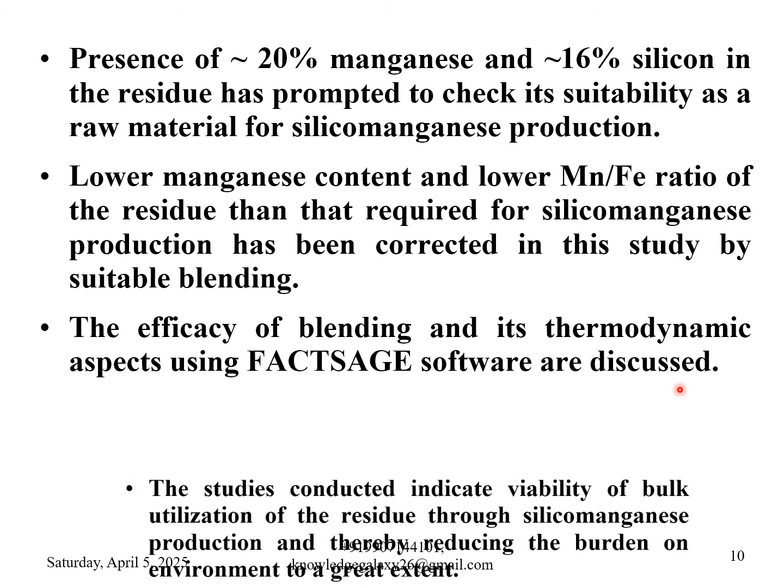The efficacy of blending and its thermodynamic aspects using FactSage software are discussed. The studies conducted indicate viability of bulk utilization of the residue through silicomanganese production and thereby reducing the burden on environment to a great extent.

So now let's have the introduction. This was the synopsis. Now let's have the introduction. Rapid depletion of major non-ferrous metal resources have stimulated efficient use of available land-based resources and vigorous search for new sources. Manganese nodules available in the beds of Pacific, Atlantic and Indian Oceans appear to be a solution for copper, nickel and cobalt.

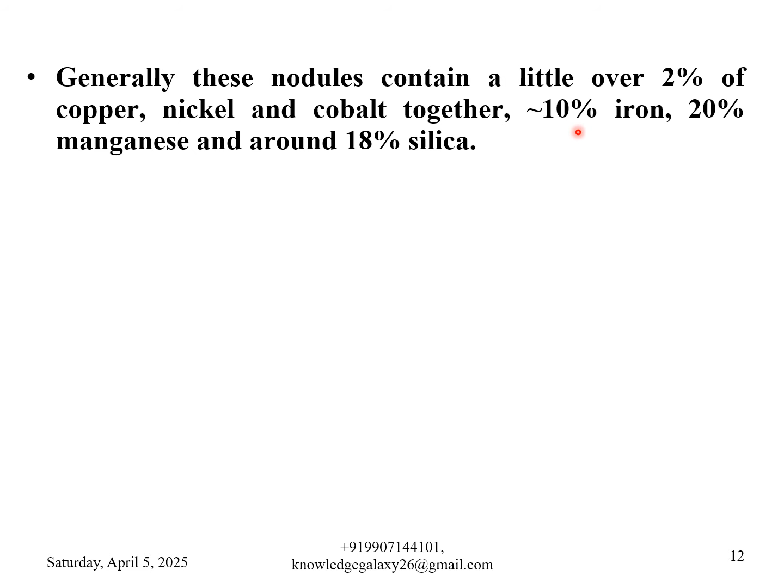Concentrations of these metals are comparable to the sum of the land-based resources. Availability of these metals in the ocean beds in manganese nodules is much more than that in the terrestrial resources. Generally, these nodules contain a little over 2% of copper, nickel and cobalt together and equivalent to 10% iron, 20% manganese and around 18% silica.

So far, the attempts have been to extract copper, nickel and cobalt from these nodules due to first strategic reasons and second their fast dwindling deposits. Though manganese is the major element in the oceanic nodules, little attempt has been made on its extraction owing to its extensive terrestrial deposits.

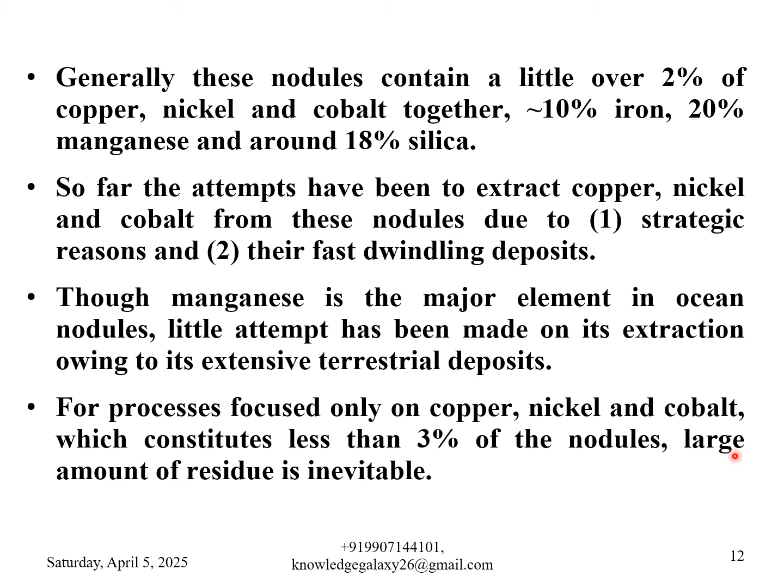For process focused only on copper, nickel and cobalt, which constitutes less than 3% of the nodules, large amount of residue is inevitable. This would be quite undesirable from the material conservation and process economics point of view. Besides, the environmental and ecological problems associated with this residue are also of great concern. Utilization of this residue for value-added products would be a better option to address the concerns mentioned above.

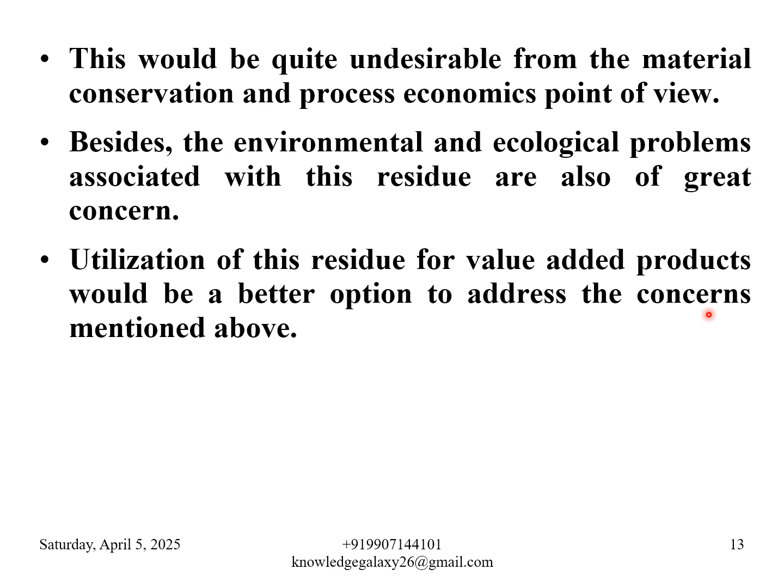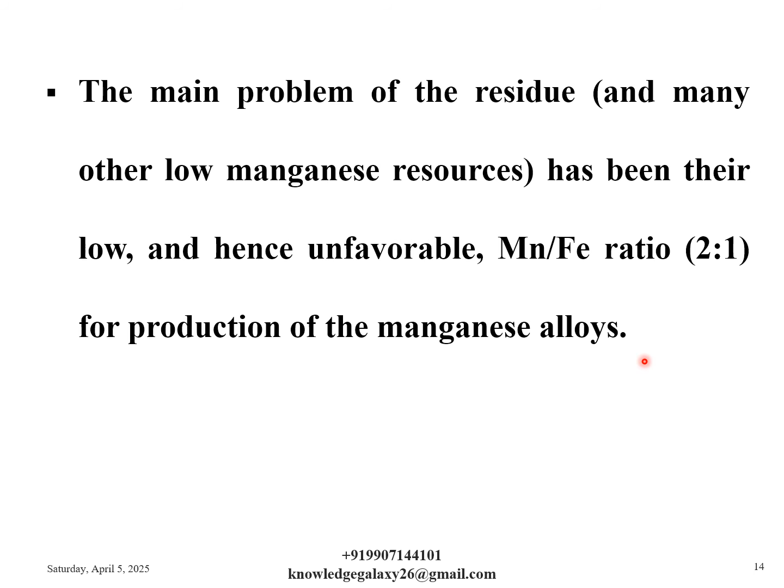Use of these residues as catalysts and or as an adsorbent for some of the heavy toxic elements is notable among them, though their consumption in these applications will be meager compared to their expected generation. The main problem of the residue and many other low manganese resources has been their low and hence unfavorable Mn/Fe ratio, that is equivalent to 2:1, for production of the manganese alloys. This drawback has been overcome suitably and has yielded standard grade silicomanganese.

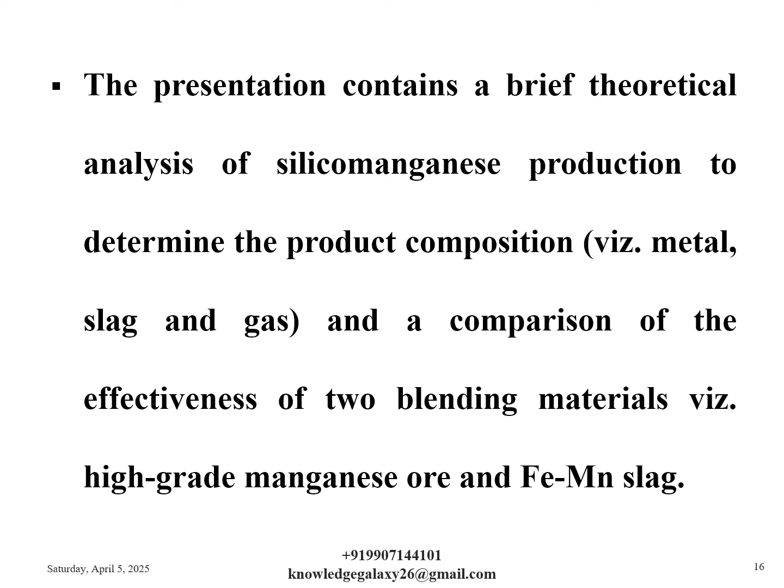There is little information other than that mentioned earlier available in the literature on the utilization of the leach residue in silicomanganese production. Generally, silicomanganese is produced in electric arc furnace by carbothermic reduction of manganese oxides and quartz or other silica sources.

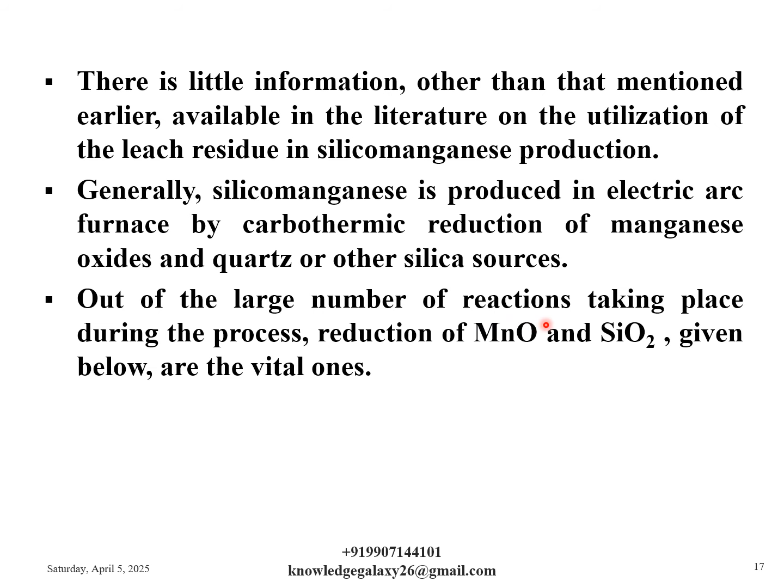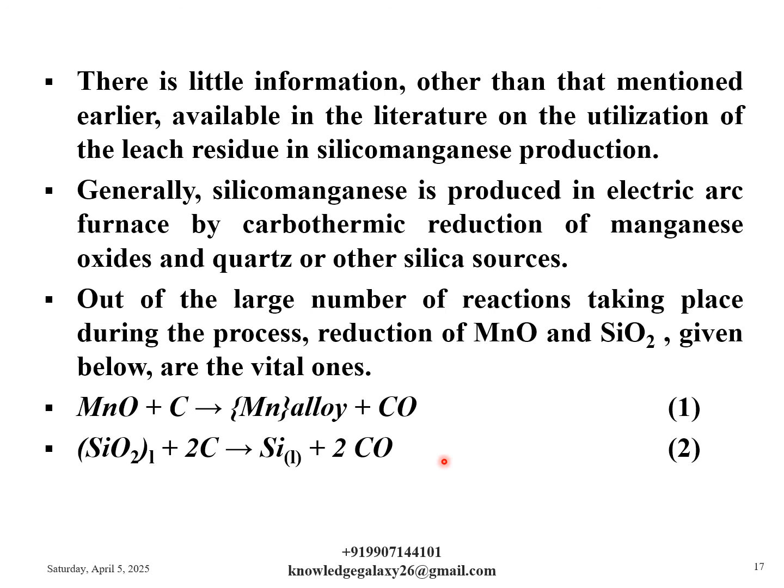Out of the large number of reactions taking place during the process, reduction of MnO and SiO2 given below are the vital ones. So first reaction is MnO plus C, this gives Mn alloy plus CO gas. SiO2 in liquid phase plus 2C, this gives Si liquid plus 2CO gas. These are the two main reactions in a generalized way.

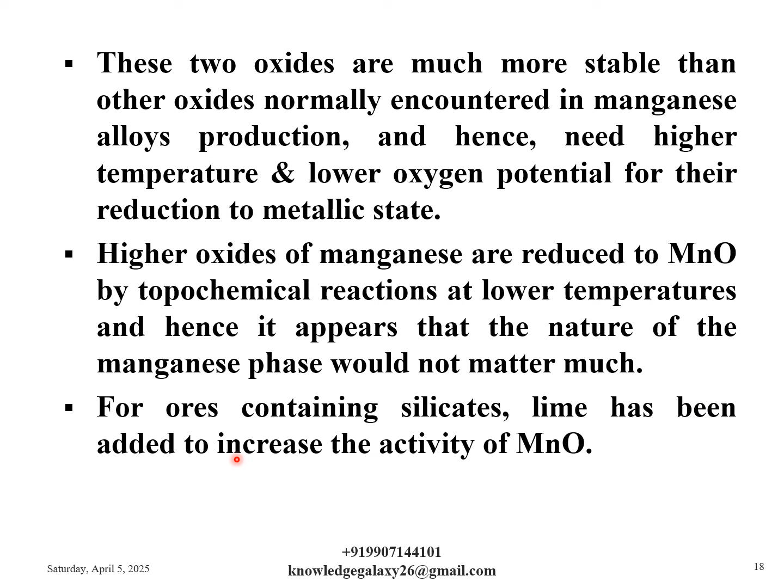These two oxides are much more stable than other oxides normally encountered in manganese alloys production, and hence need higher temperature and lower oxygen potential for their reduction to metallic state. Higher oxides of manganese are reduced to MnO by topochemical reactions at lower temperatures, and hence it appears that the nature of the manganese phase would not matter much. For ores containing silicates, lime has been added to increase the activity of MnO.

Being less stable, iron oxides get reduced progressively to its metallic state before the reduction of MnO and SiO2, and as a result, practically all iron reports to the alloy phase. As a result, selective reduction of manganese cannot be attained through maneuvering of the operating parameters, and this restricts the use of resources with low Mn by Fe ratios.

My dear friends, in practical industrial operations, you might have faced this difficulty that low Mn by Fe ratio ores are not used very much, and it is very difficult to utilize them, and you might have been asked why low Mn by Fe ratio ores cannot be used, or what is the drawback of using them. So I hope I have provided you the reason why low Mn by Fe ratio ores are not utilized or cannot be used.

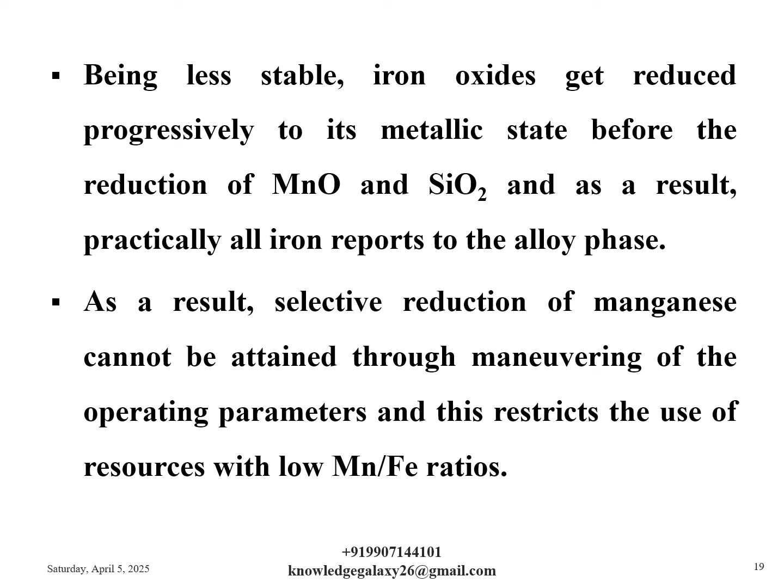Further, the requirements of higher manganese reduction or recoveries are contrasting to that of silicon, a basic slag for manganese and an acidic slag for silicon reduction. I am again repeating it: a basic slag is required for manganese reduction and an acidic slag for silicon reduction. Composition of the charge and the operating conditions hence need to be balanced to have good recovery and desired grade.

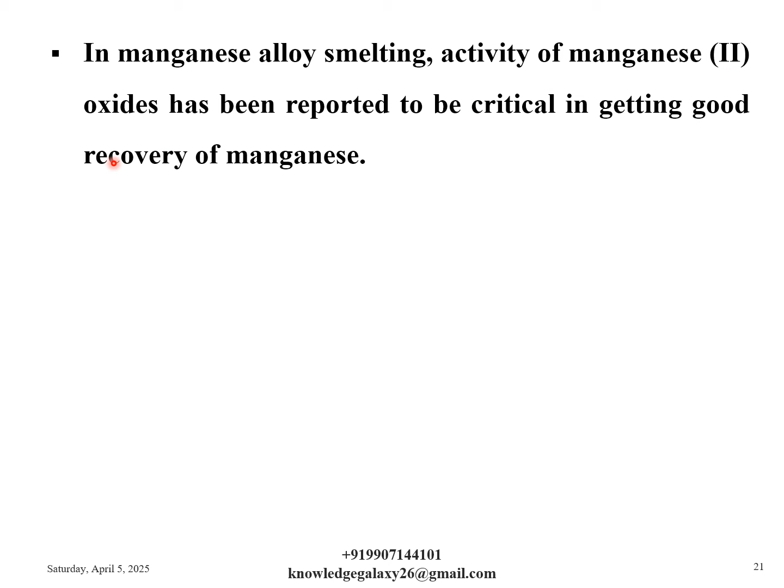In manganese alloy smelting, activity of manganese(II) oxide has been reported to be critical in getting good recovery of manganese. Reports suggest that secondary raw materials such as slag, etc. in the charge may affect the recovery of manganese adversely. Here the slag refers to high carbon ferromanganese slag.

Partial replacement of lime by MgO increases the melting temperature as a result of the increase in resistivity, which in turn enhances the grade and recovery in silicomanganese alloy production. My dear friends, this is the main reason why to use dolomite, which is a double oxide of CaO and MgO, as a flux in place of lime. So this is a very useful point. Please do remember this.

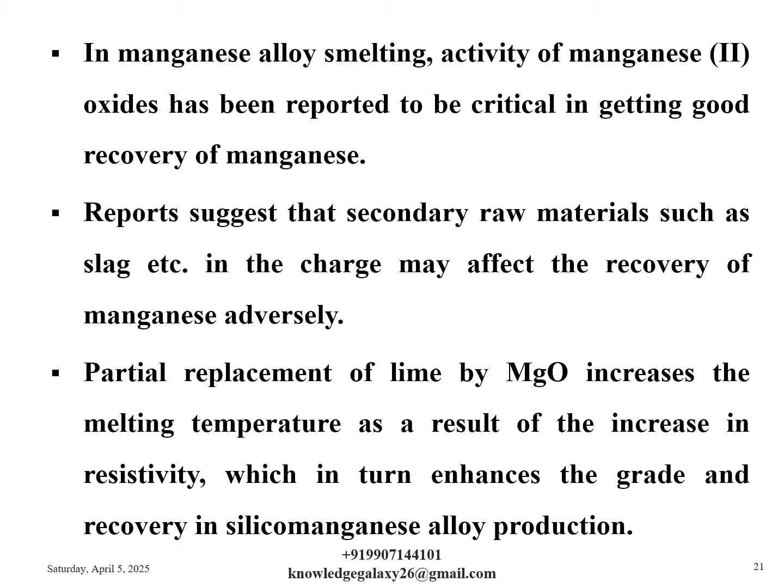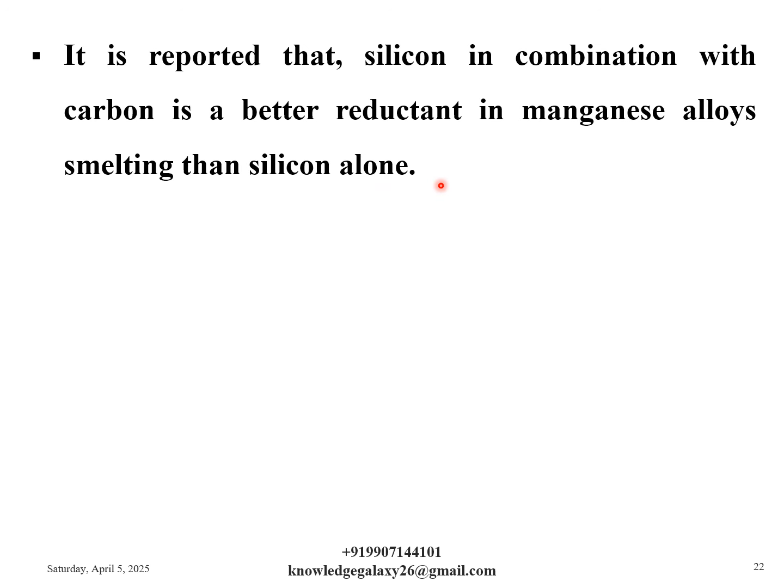It is reported that silicon in combination with carbon is a better reductant in manganese alloys smelting than silicon alone. Quartzite coke has been found to be better in terms of recovery and grade of manganese than metallurgical coke. Silicothermic reduction of slag has also been tried for the production of silicomanganese.

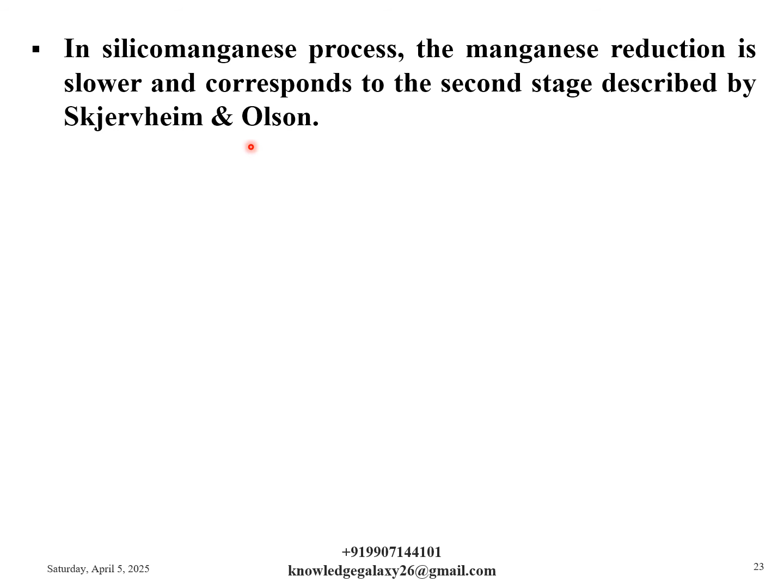In silicomanganese process, the manganese reduction is slower and corresponds to the second stage described by Skjervheim and Olson. The slow reduction rate in silicomanganese process is also attributed to the decreased MnO activity due to the presence of Al2O3 and/or SiO2.

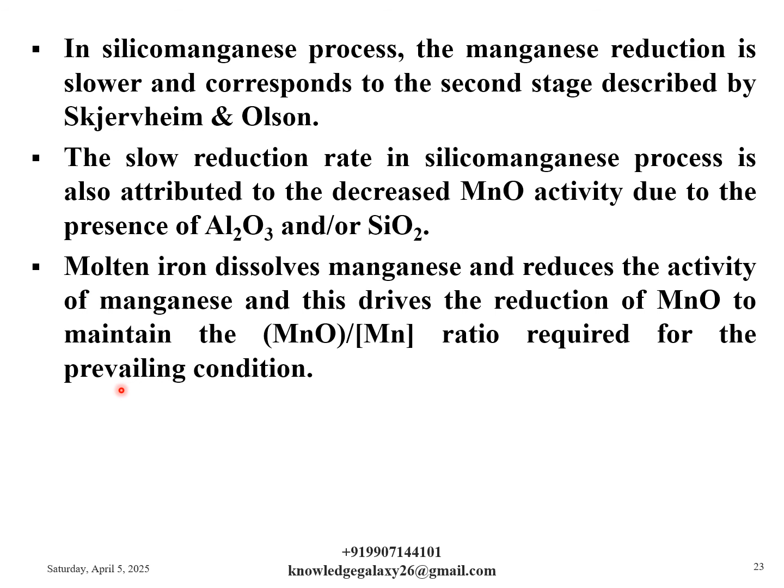Molten iron dissolves manganese and reduces the activity of manganese, and this drives the reduction of MnO to maintain the MnO by Mn ratio required for the prevailing condition.

With the increase in silicon content of the alloy, carbides become less stable and silicides become dominant, which implies the carbon content of the alloy decreases with increase in silicon content. My dear friend, this is also a very good and very important observation, that silicon and carbon are inversely proportional. That means with the increase of silicon content, carbon content decreases.

As you might have observed, higher grade of silicon in silicomanganese has a lower amount of carbon, and this is also depicted by a very nicely explained curve, which is also available in my videos of production of silicomanganese. So you can refer to that video for knowing about the curve.

Low manganese, high iron ores can also be used for making silicomanganese after converting it to a high manganese slag. It is possible to obtain silicomanganese with low sulfur and phosphorus content even from fine substandard manganese bearing materials using plasma technology. The escape of SiO and manganese vapors, etc., which are likely in silicomanganese smelting, needs to be minimized suitably to avoid material losses.

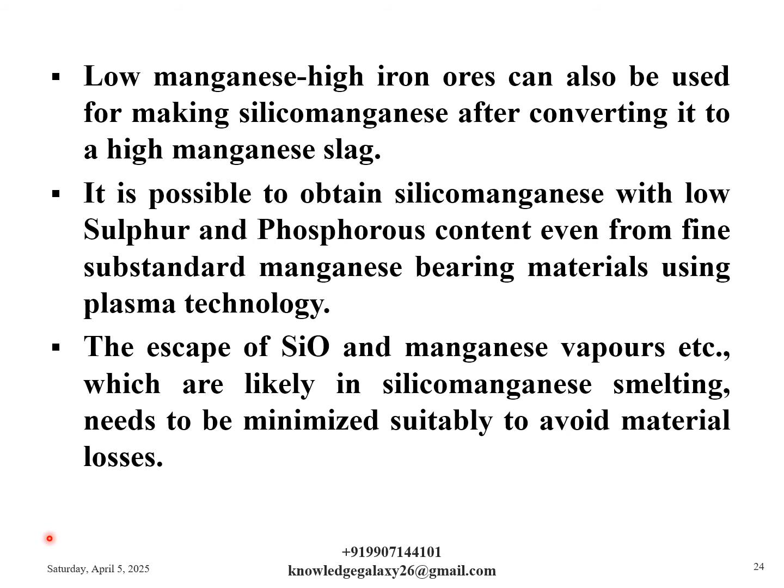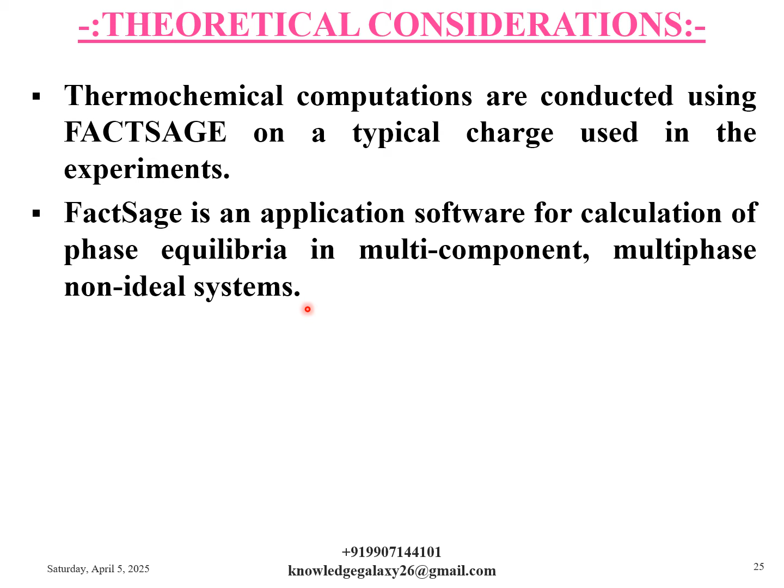Now let us have some theoretical considerations. Thermochemical computations are conducted using FactSage on a typical charge used in the experiments. FactSage is an application software for calculation of phase equilibria in multi-component, multi-phase, non-ideal systems. It works by Gibbs energy minimization using a diverse set of solution models available within it.

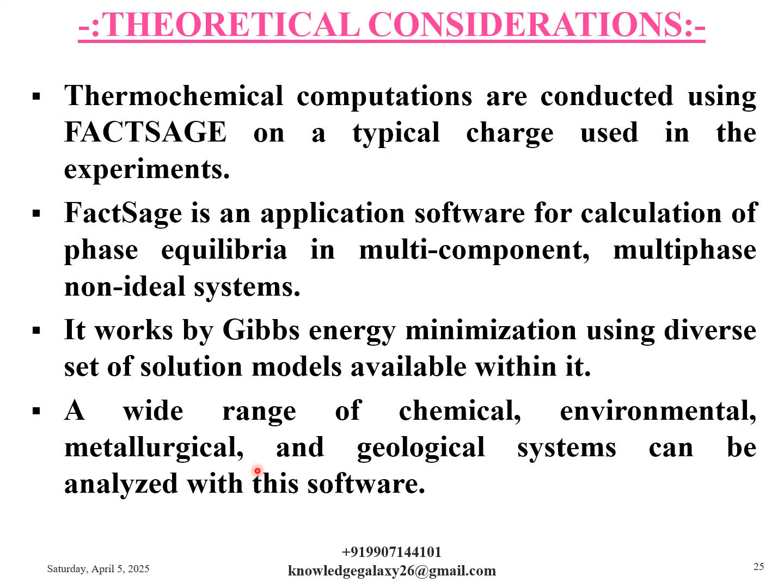A wide range of chemical, environmental, metallurgical and geological systems can be analyzed with this software. The moles input to the software is given in table 1 in the next slide and corresponds to the charge given at table 8. Table 8 is presented later in this presentation.

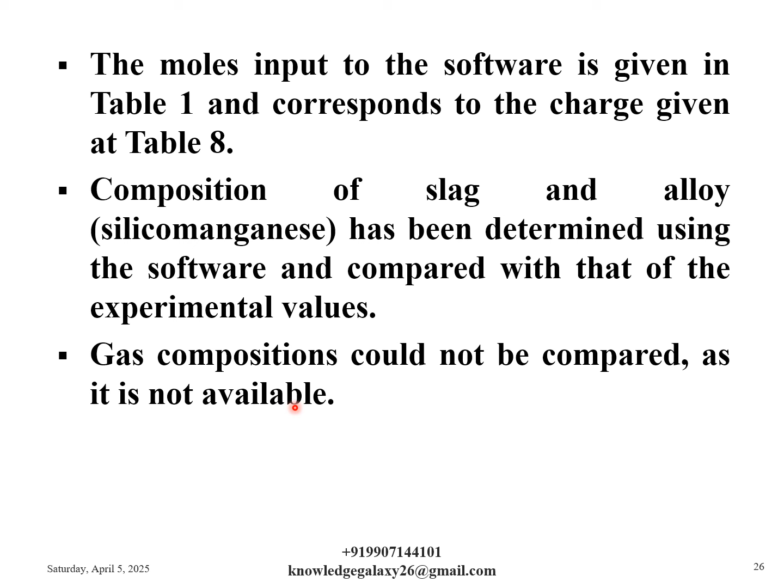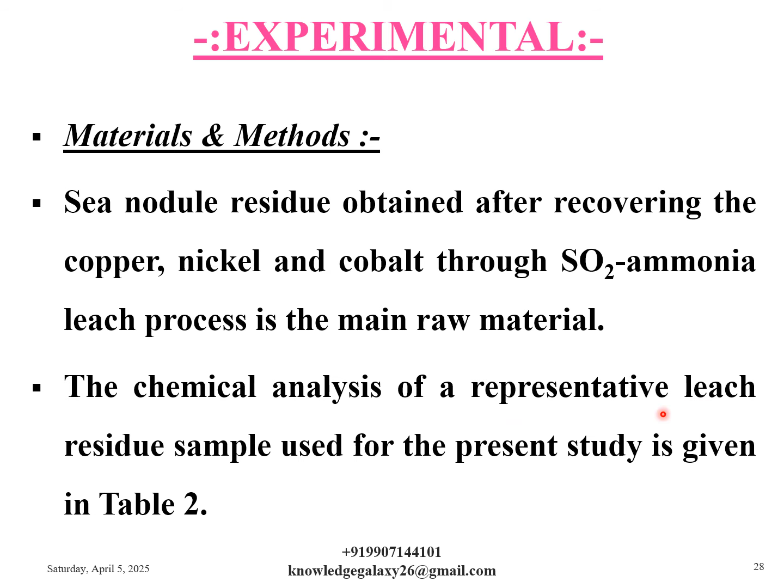Okay, moving ahead. So now let us discuss the experimental, what we have done. So first is materials and methods. Sea nodule residue obtained after recovering the copper, nickel and cobalt through SO2 ammonia leach process is the main raw material. The chemical analysis of a representative leach residue sample used for the present study is given in table 2.

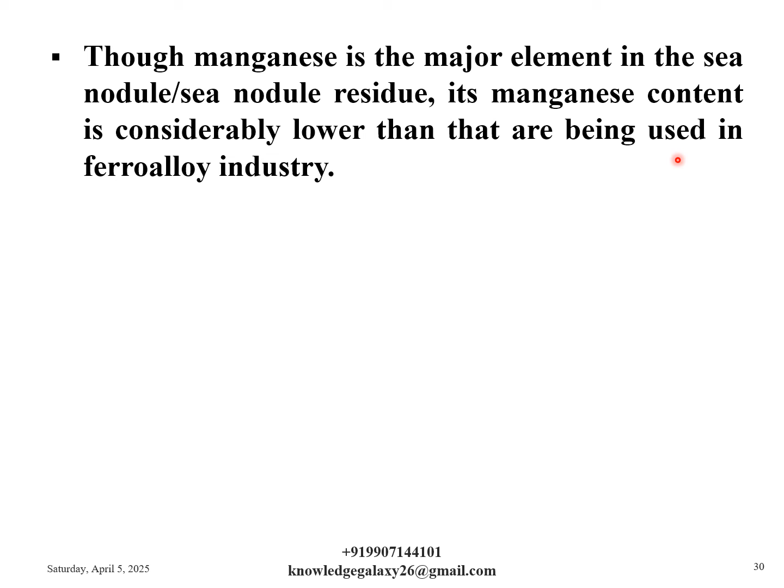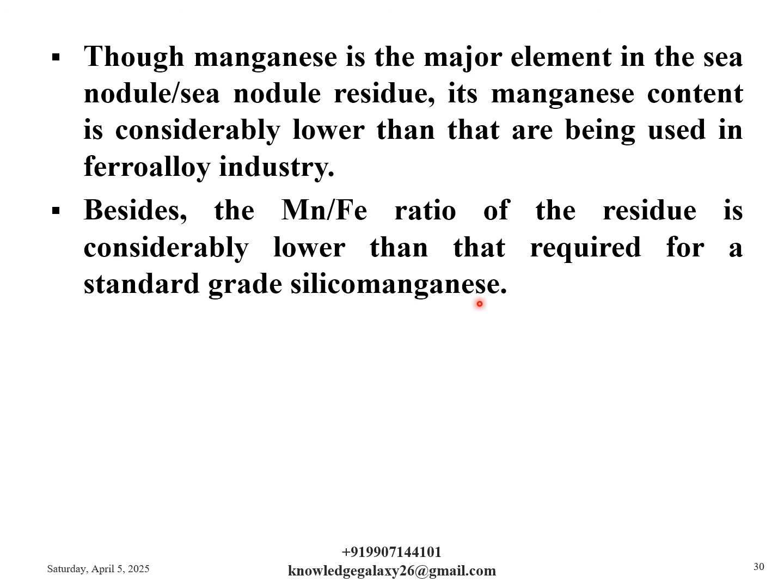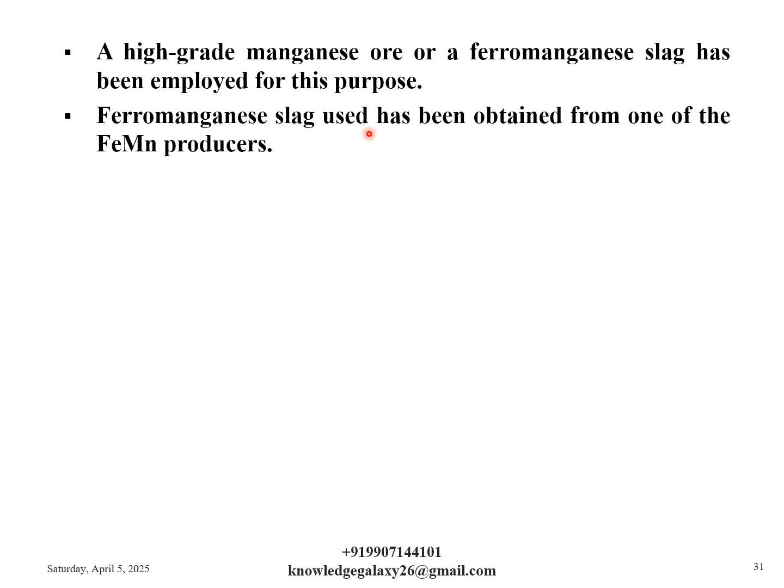As the scope of improving the grade of the residue by physical concentration methods is practically nil, the residue has been enriched through proper blending. A high-grade manganese ore or a ferromanganese slag has been employed for this purpose, that is for the blending of low-grade manganese sea nodule residue. Ferromanganese slag used has been obtained from one of the ferromanganese producers. The manganese ore has been from indigenous mines.

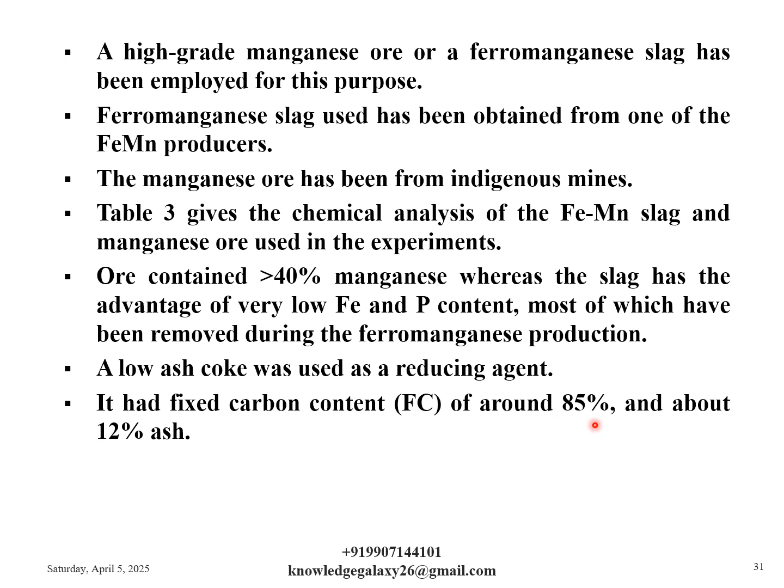Table 3, which is given in the next slide, gives the chemical analysis of the ferromanganese slag and manganese ore used in the experiments. Ore contained more than 40% manganese, whereas the slag has the advantage of very low iron and phosphorus content, most of which have been removed during the ferromanganese production. A low ash coke was used as a reducing agent. It had fixed carbon content, that is FC, of around 85% and about 12% ash.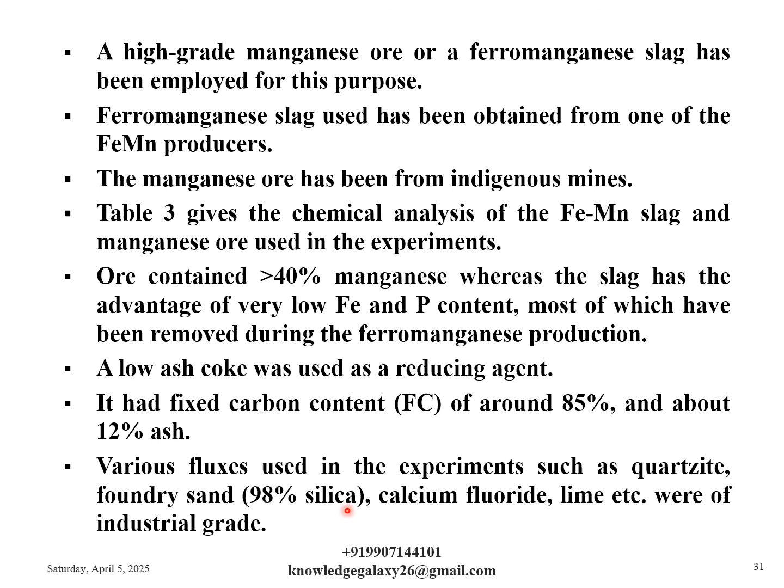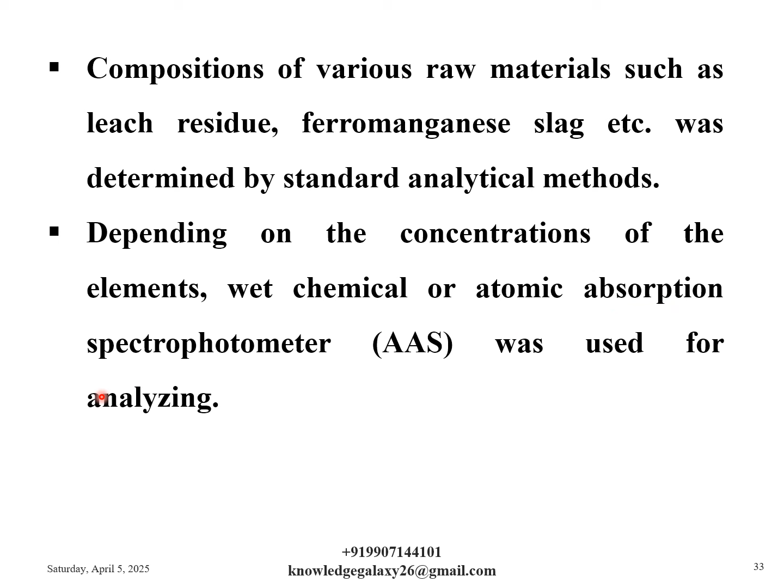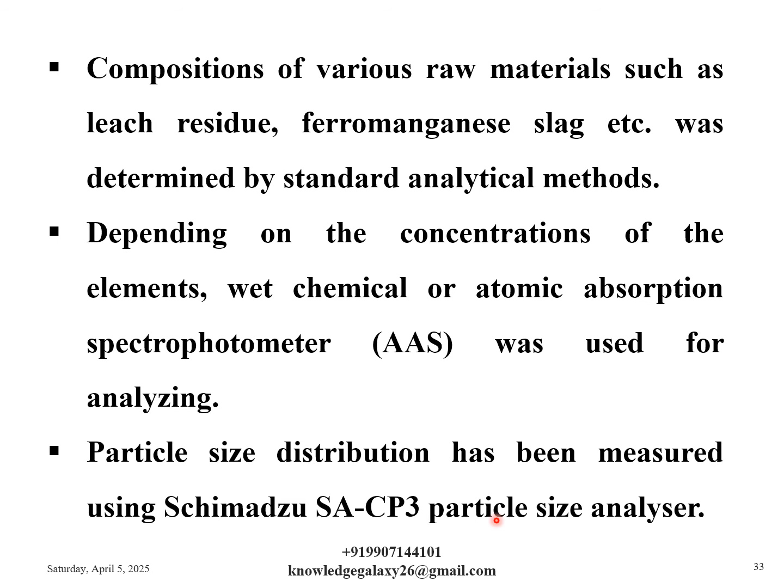Compositions of various raw materials such as leach residue, ferromanganese slag, etc. were determined by standard analytical methods. Depending on the concentrations of the elements, wet chemical or atomic absorption spectrophotometer, that is AAS, was used for analyzing. Particle size distribution has been measured using Schimadzu SA-CP3 particle size analyzer.

So now let us discuss the smelting process. The fine nature of the residue, characterized by D50 equivalent to 10 micron and D10 equivalent to 3 micron, necessitated its agglomeration to avoid material losses and to have sufficient charge permeability.

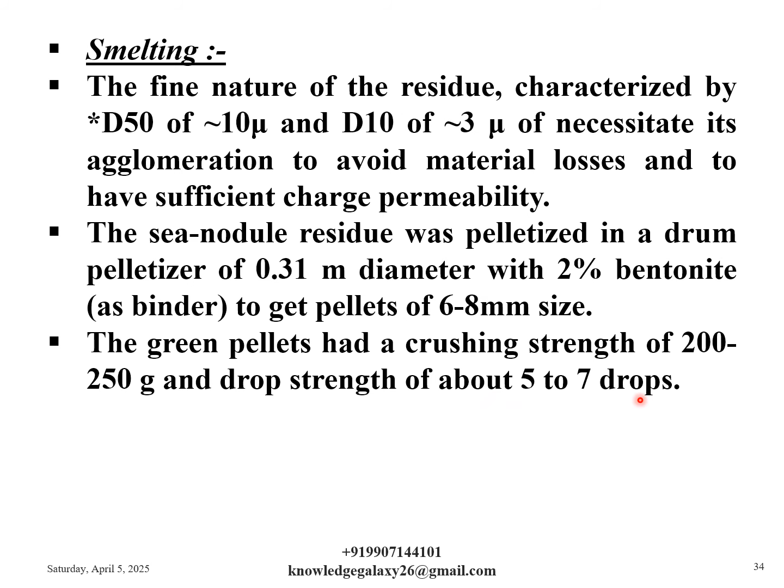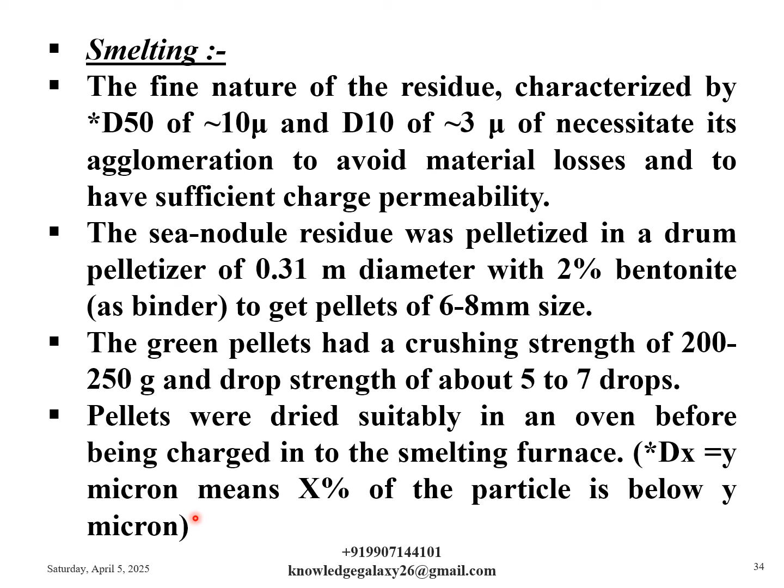The sea nodule residue was pelletized in a drum pelletizer of 0.31 meter diameter with 2% bentonite as binder to get pellets of 6 to 8 mm size. The green pellets had a crushing strength of 200 to 250 gram and drop strength of about 5 to 7 drops. Pellets were dried suitably in an oven before being charged into the smelting furnace. Here Dx equal to y micron means x% of the particles are below y micron.

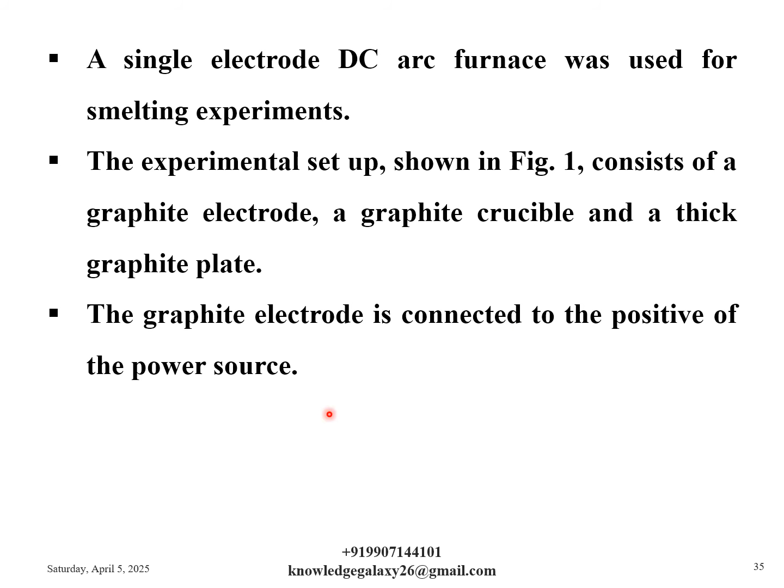A single electrode DC arc furnace was used for smelting experiments. The experimental setup is shown in the figure in the next slide. It consists of a graphite electrode, a graphite crucible and a thick graphite plate. The graphite electrode is connected to the positive of the power source. The graphite crucible rests on the graphite plate, which is connected to the negative of the power source. So this is the experimental setup for smelting, and the details I have just explained.

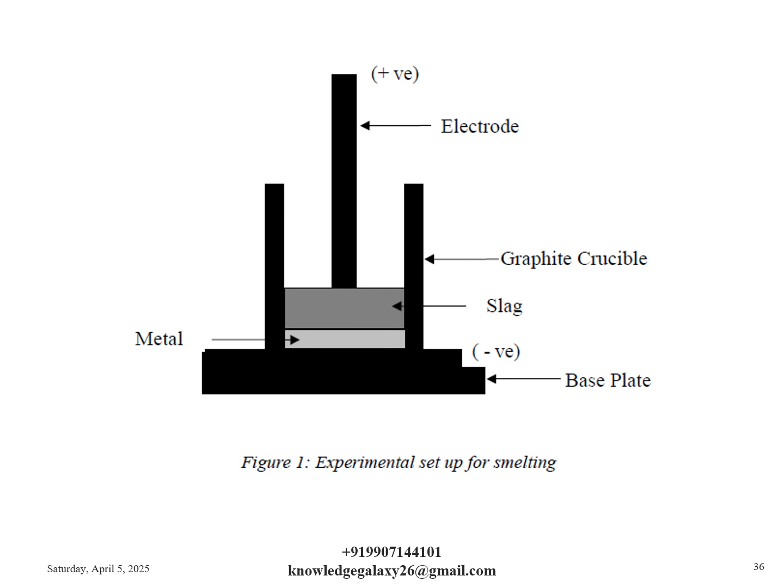The crucible and the plate together act as the negative electrode of the system. The graphite electrode, which is connected to the positive of the power source, can be positioned at any desired level in the vertical direction with the help of a motorized rack and pinion arrangement. A refractory jacket around the crucible prevented heat losses from the system. The charge is smelted in the graphite crucible.

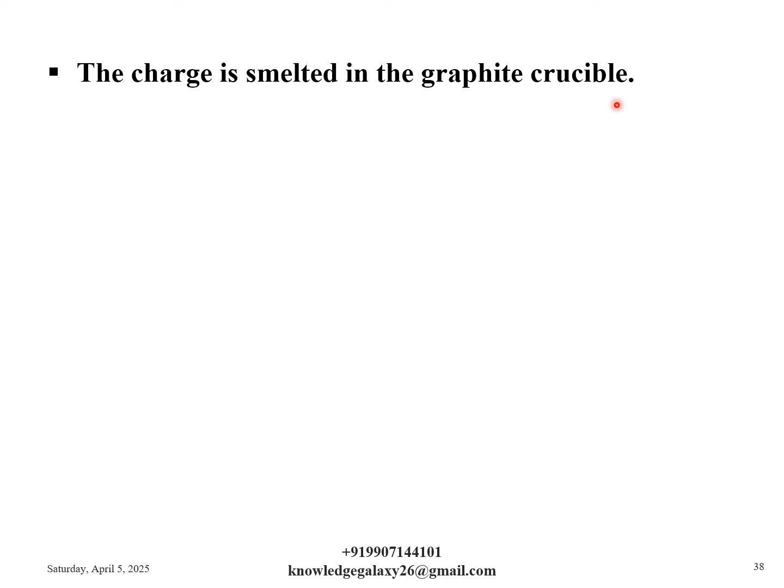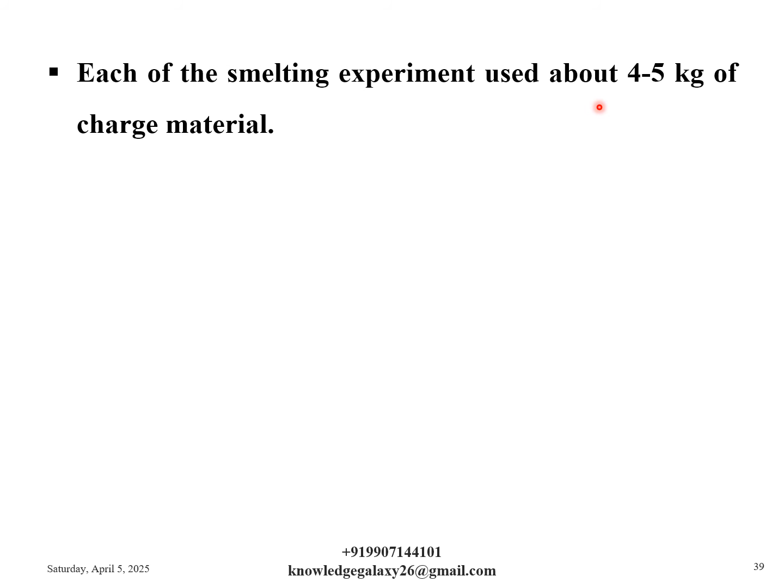Small amounts of charge consisting of residue pellets, manganese ore and/or ferromanganese slag, coke and fluxes were added to the arc zone in the crucible. As mentioned earlier, manganese ore and ferromanganese slag are used to enrich manganese and hence to correct the low Mn/Fe ratio. As smelting proceeded, further charge addition was made to the crucible. Each smelting experiment used about 4 to 5 kg of charge material.

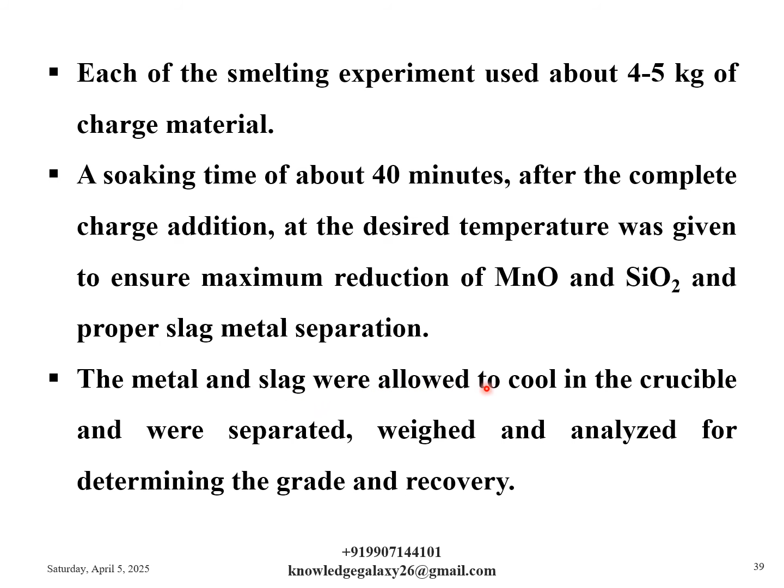A soaking time of about 40 minutes after the complete charge addition at the desired temperature was given to ensure maximum reduction of MnO and SiO2 and proper slag metal separation. Then the metal and slag were allowed to cool in the crucible and were separated, weighed and analyzed for determining the grade and recovery.

So now we have come to results and some more discussion. Due to the very fine nature of the residue and lack of crystallinity, no sharp peaks were seen in the X-ray diffractogram. However, presence of Mn2O3, MnO.Mn2O3, Mn3O4, Fe3O4, FeO and SiO2 phases is likely in the residue.

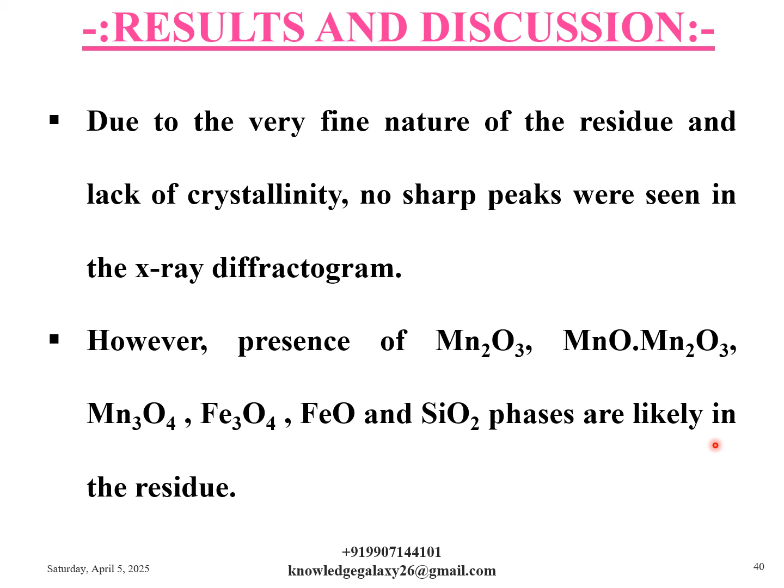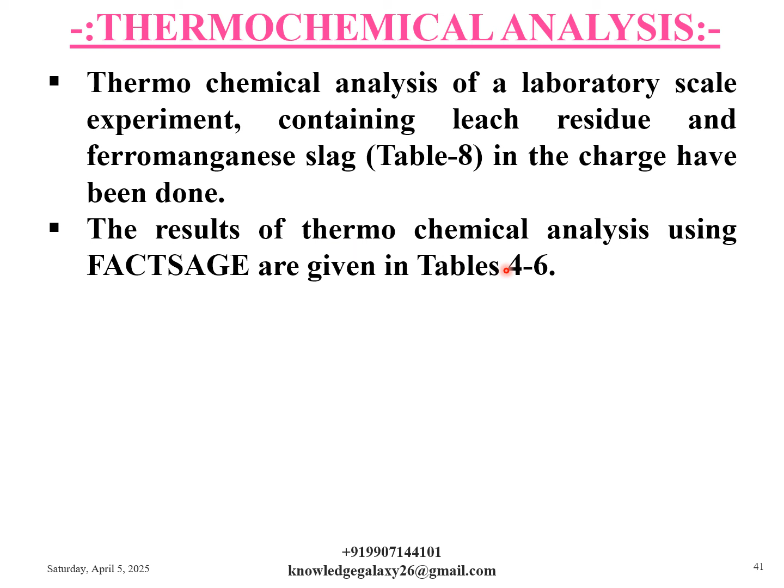Let us discuss the thermochemical analysis of the experiment. Thermochemical analysis of a laboratory scale experiment containing leach residue and ferromanganese slag, given in table 8 in the charge, has been done. The results of thermochemical analysis using FactSage are given in tables 4 to 6. Table 4 contains the composition of the output streams at various temperatures from 1673 to 1973 Kelvin for the input given in table 1.

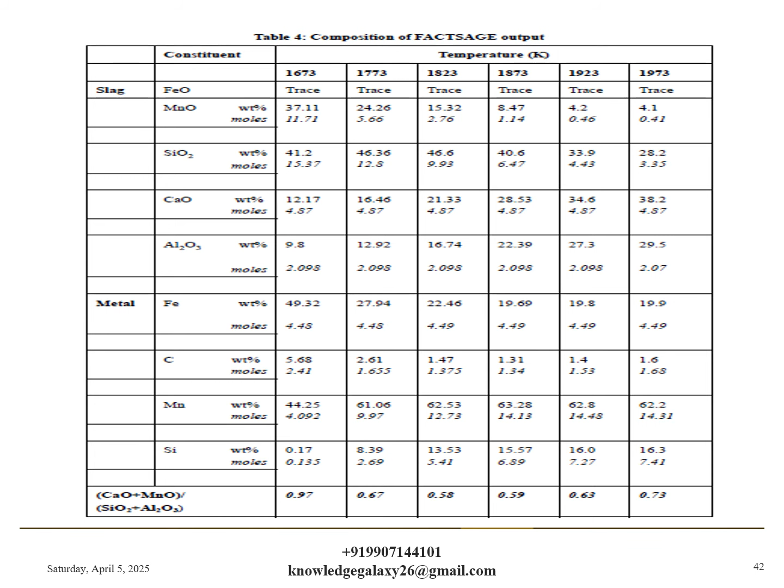From table 4, it is observed that the MnO content of the slag decreases with increase in temperature. This is quite expected; I hope I don't have to explain it much. So this is table 4, which gives the compositions of the FactSage output. As usual, you can pause the video and observe the content of the table very carefully.

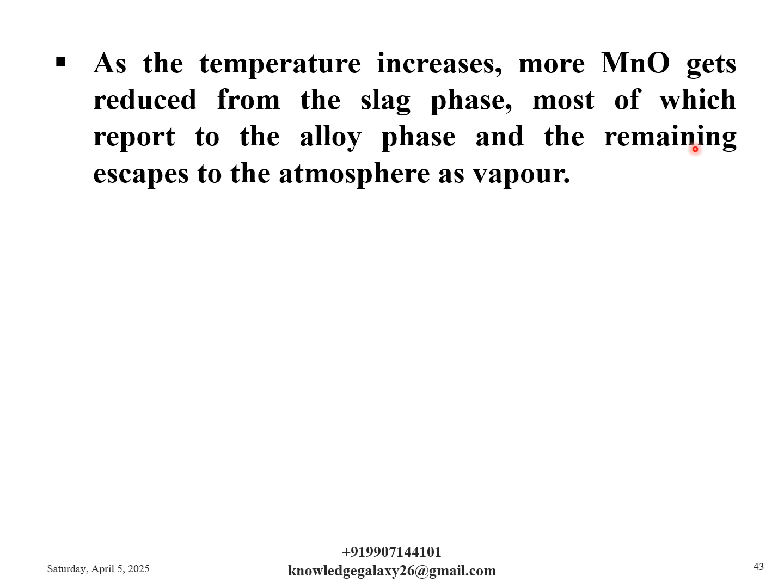As the temperature increases, more MnO gets reduced from the slag phase, most of which reports to the alloy phase, and the remaining escapes to the atmosphere as vapor. The silica content of the slag, however, shows an increase, reaches a maximum at 1823 Kelvin and then declines. On the other hand, the (CaO + MnO)/(SiO2 + Al2O3) ratio given in table 4 decreases till 1823 Kelvin and then increases. These two together show that manganese reduction predominates till 1823 Kelvin and silica reduction accelerates after 1823 Kelvin.

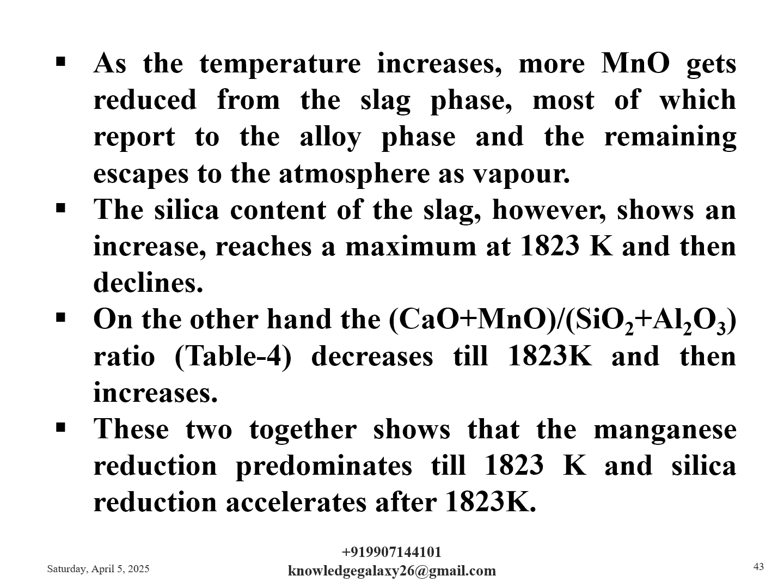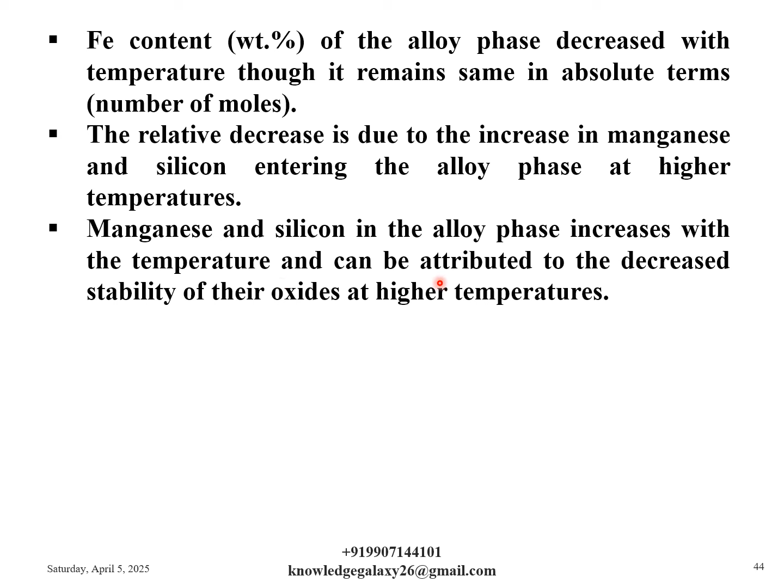Iron content, that is weight percent in the alloy phase, decreased with temperature, though it remains the same in absolute terms, that is number of moles. The relative decrease is due to the increase in manganese and silicon entering the alloy phase at higher temperatures. Manganese and silicon in the alloy phase increase with temperature, which can be attributed to the decreased stability of their oxides at higher temperatures. The rate of increase of silicon reduction is less compared to that of manganese.

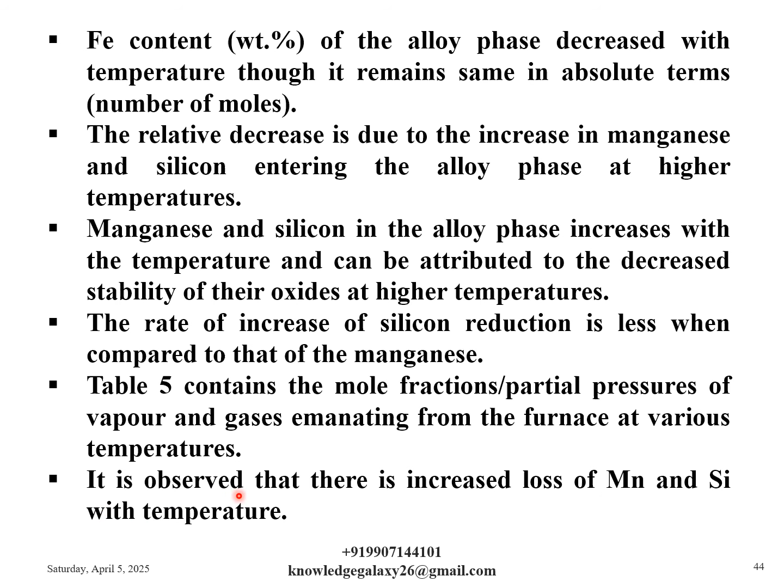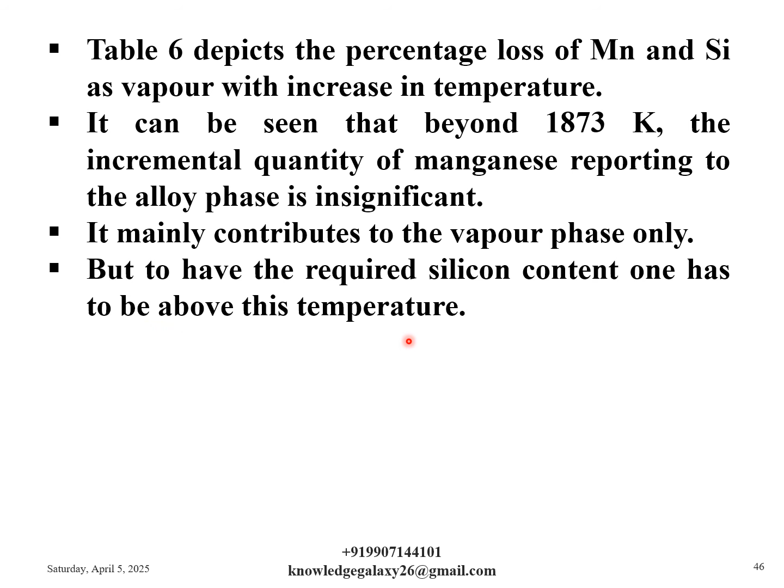Table 6 depicts the percentage loss of manganese and silicon as vapor with increase in temperature. It can be seen that beyond 1873 Kelvin, the incremental quantity of manganese reporting to the alloy phase is insignificant. It mainly contributes to the vapor phase only. But to have the required silicon content, one has to be above this temperature. Hence, a proper balance has to be arrived at to have the required silicon content without much loss of manganese.

Okay, so far so good. Now let us move on and discuss the smelting of leach residue. Due to the low manganese content and Mn/Fe ratio of the residue, a medium grade silicomanganese alloy viz. silicon 16%, manganese 63%, with silicon 14 to 17% and manganese 60 to 65% range, has been aimed. The leach residue was smelted as mentioned above.

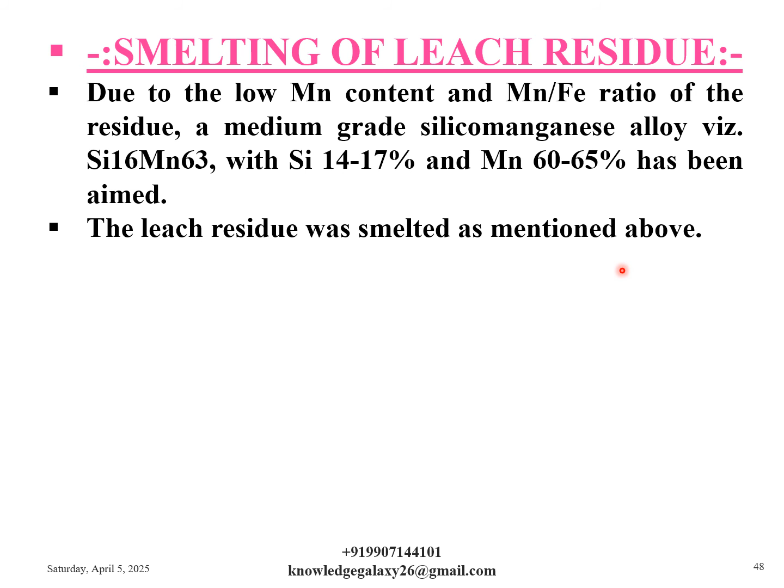The results of the experiments using manganese ore as the blending material are shown in table 7, which is given in the next slide. The grade of the alloy obtained was marginally lower than envisaged as far as manganese and silicon were concerned. However, good recovery of manganese and silicon has been achieved. So this is table 7, which shows the results of smelting studies for blending with manganese ore. You can pause the video and observe the contents.

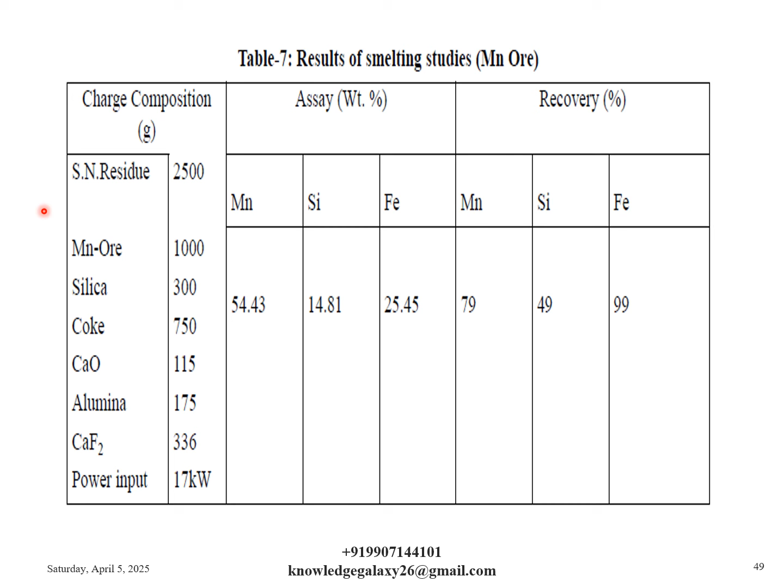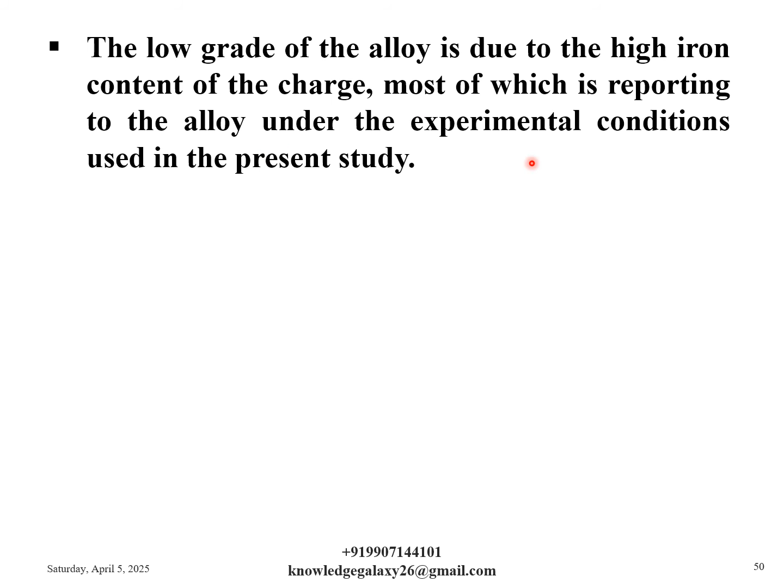As is depicted in the above table, the low grade of the alloy is due to the high iron content of the charge, most of which is reporting to the alloy under the experimental conditions used in the present study. Increasing the percentage of manganese ore in the charge will help in increasing the Mn/Fe ratio of the charge, which in turn leads to a grade conforming to standard specification.

Since our main aim was to utilize the residue, experiments with increased manganese ore in the charge have not been attempted. An alternative material has been tried instead to enrich the manganese content, and the details are given in the next slides.

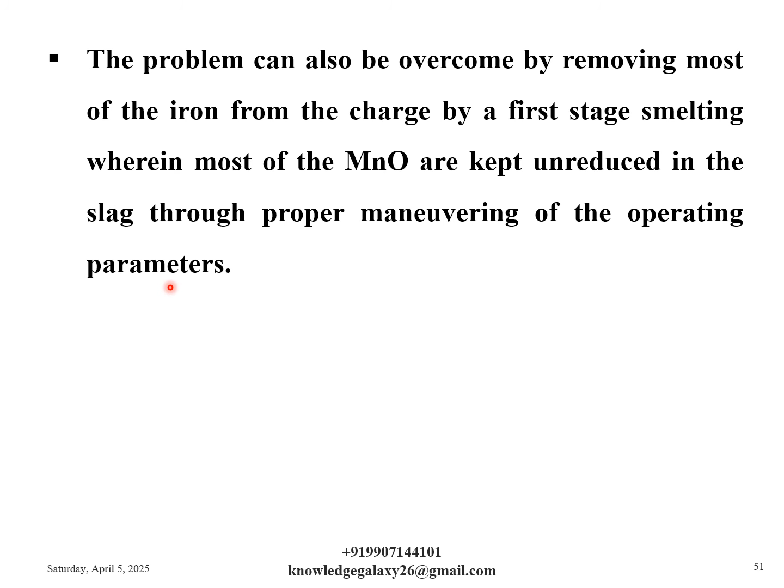The problem can also be overcome by removing most of the iron from the charge by a first stage smelting, wherein most of the MnO is kept unreduced in the slag through proper maneuvering of the operating parameters. The slag thus obtained will not only be rich but also have the high Mn/Fe ratio required in ferroalloy manufacture, which on further smelting with additional coke ensures silicomanganese of desired grade.

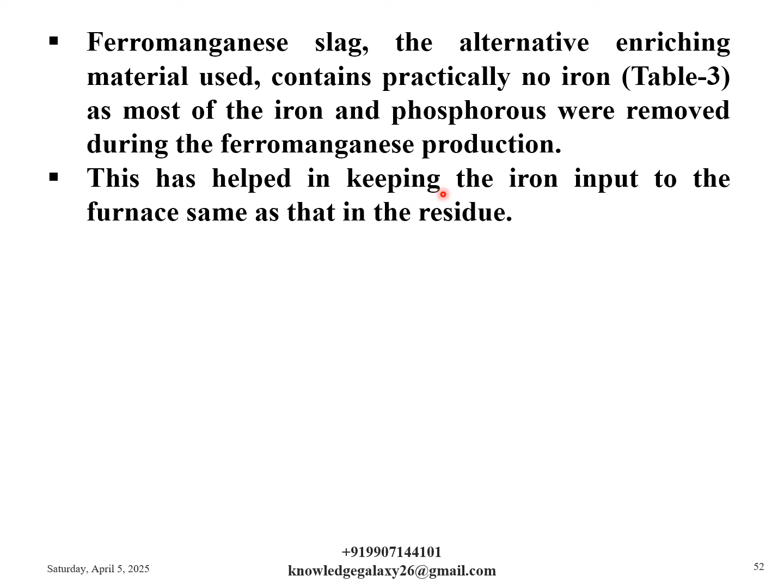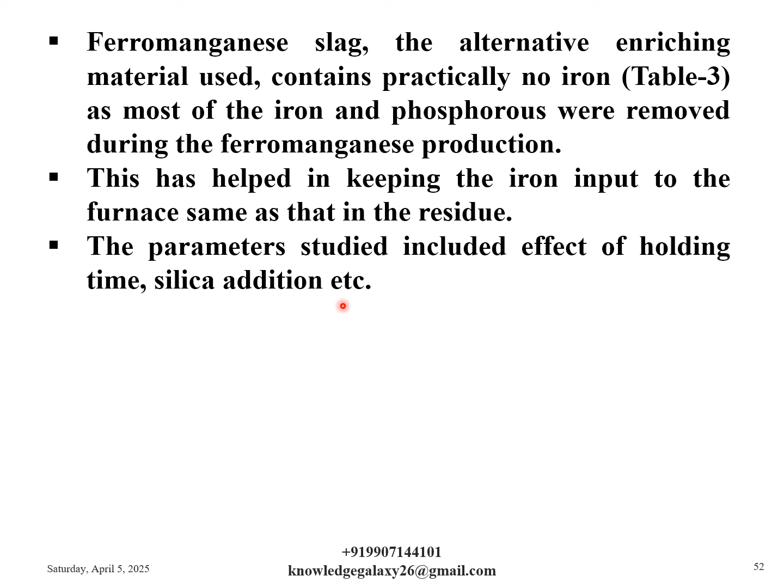Ferromanganese slag, the alternative enriching material used, contains practically no iron, as depicted in the table 3 analysis, as most of the iron and phosphorus were removed during ferromanganese production. This has helped in keeping the iron input to the furnace the same as that in the residue. The parameters studied included effect of holding time, silica addition, etc. The results are given in table 8, which is shown in the next slide.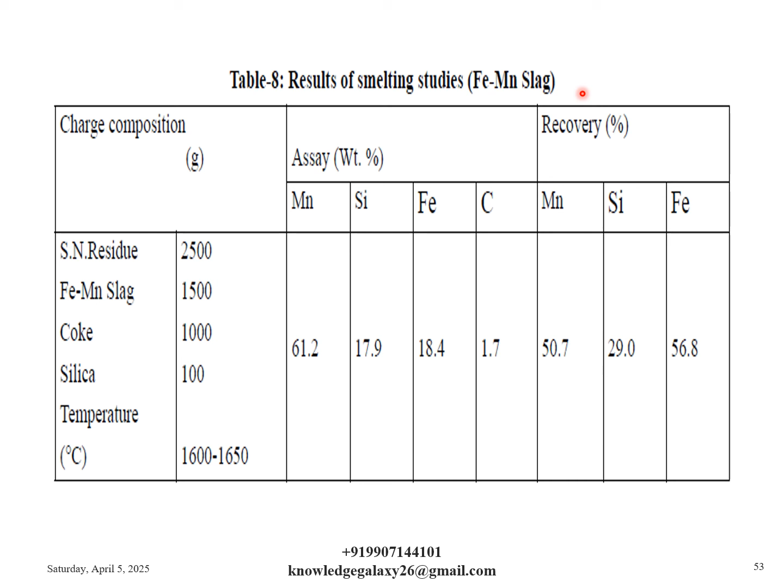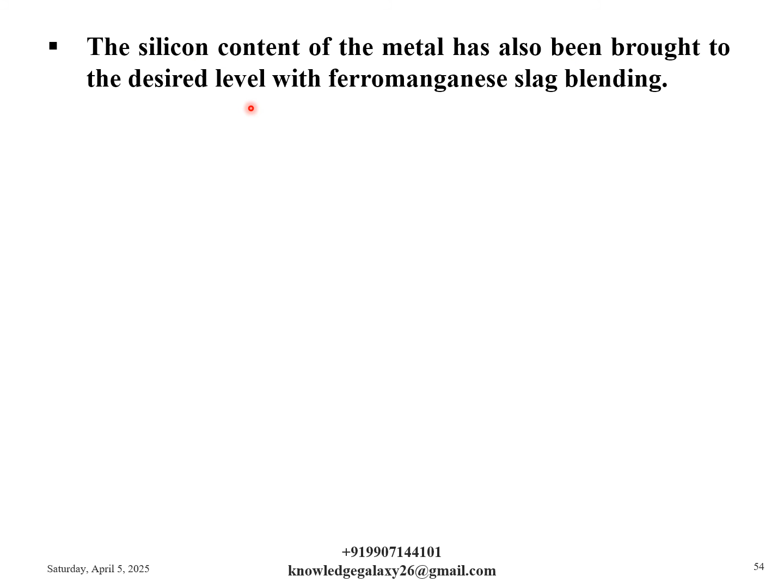In general, the slag formed in the experiments with ferromanganese slag addition was viscous and as a result caused foaming and poor slag metal separation. It is seen that the manganese content of the alloy, equivalent to 60%, was within the desired level. So this is table 8, which shows the results of smelting studies for ferromanganese slag addition as enrichment. The silicon content of the metal has also been brought to the desired level with ferromanganese slag blending.

However, the manganese recovery was around 50% only, and this may be attributed to metal entrapment due to increased viscosity of the slag. The low iron recovery substantiates this argument. Low grade and secondary nature of the charged materials like leach residue, ferromanganese slag, etc. may also be responsible for the low recoveries, as reported in the literature.

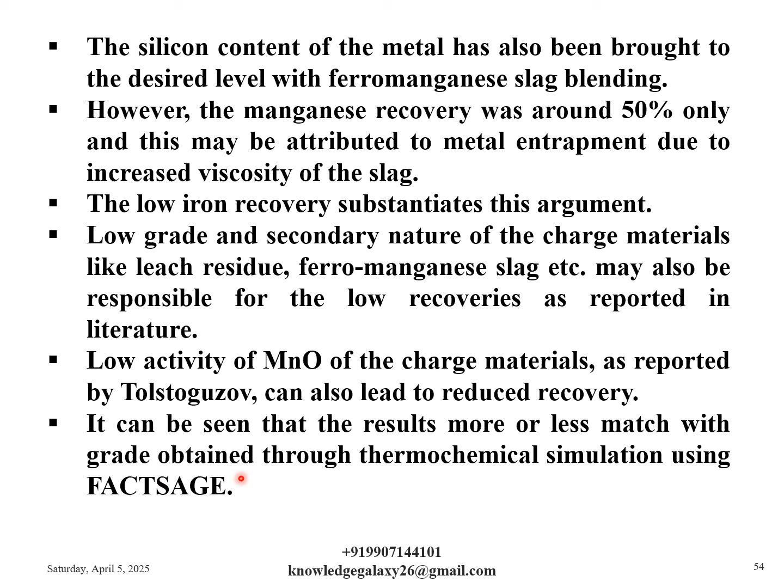Low activity of MnO of the charged materials, as reported by Tolstoguzov, can also lead to reduced recovery. It can be seen that the results more or less match with the grade obtained through thermochemical simulation using FactSage.

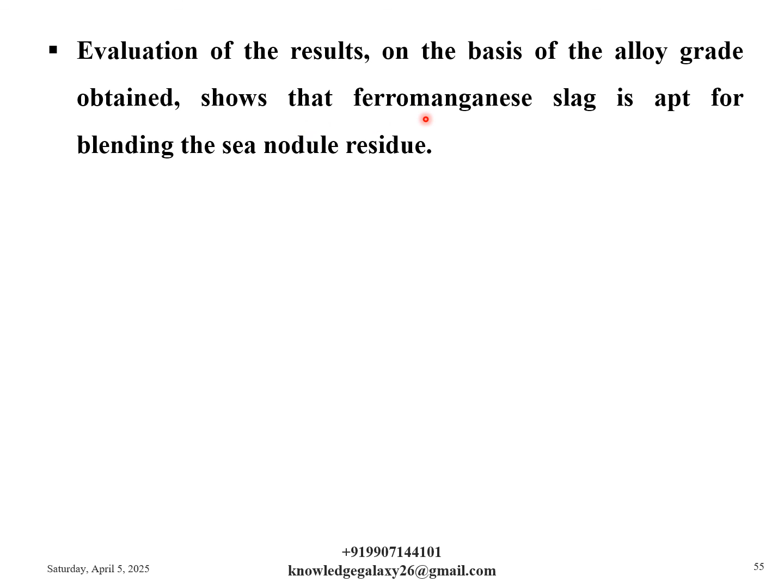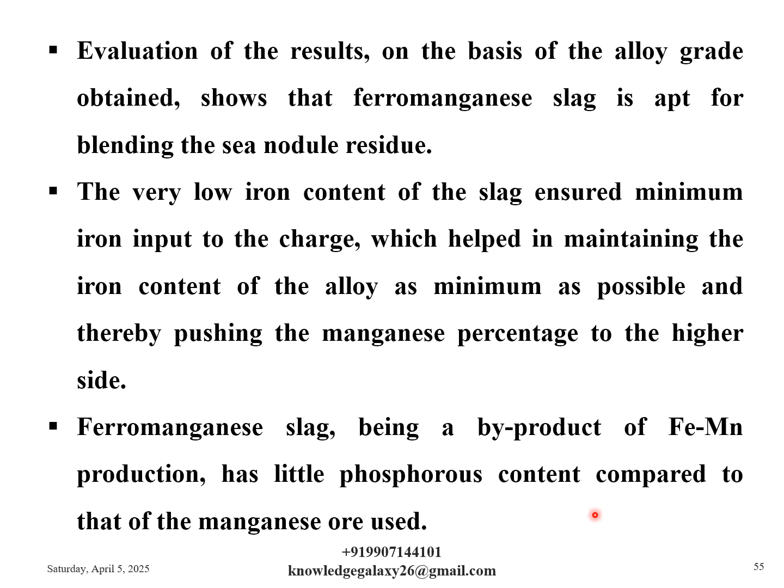Evaluation of the results on the basis of the alloy grade obtained shows that ferromanganese slag is apt for blending the sea nodule residue. The very low iron content of the slag ensured minimum iron input to the charge, which helped in keeping the iron content of the alloy as low as possible and thereby pushing the manganese percentage to the higher side. Ferromanganese slag, being a byproduct of ferromanganese production, has little phosphorus content compared to that of the manganese ore used.

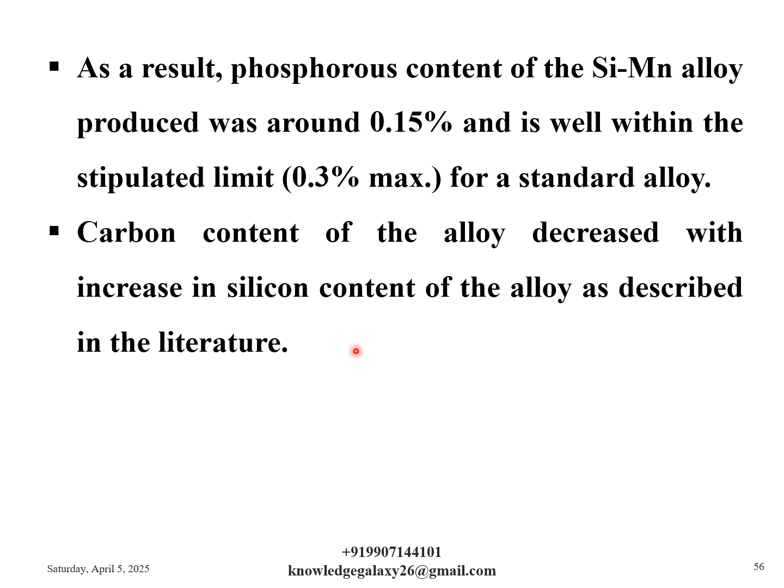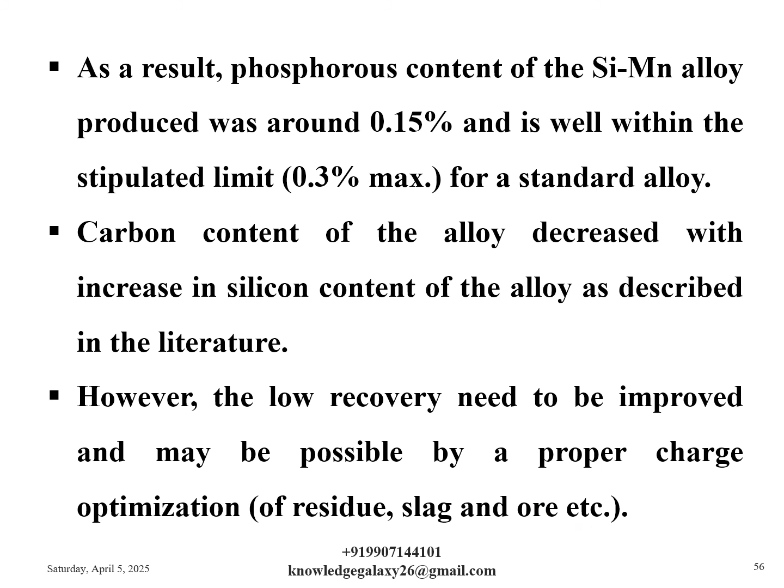As a result, phosphorus content of the silicomanganese alloy produced was around 0.15% and is well within the stipulated limit of 0.3% max for a standard alloy. Carbon content of the alloy decreased with increase in silicon content of the alloy, as described in the literature and as I have mentioned previously. However, the low recovery needs to be improved and may be possible by a proper charge optimization, that is of residue, slag and ore compositions, etc.

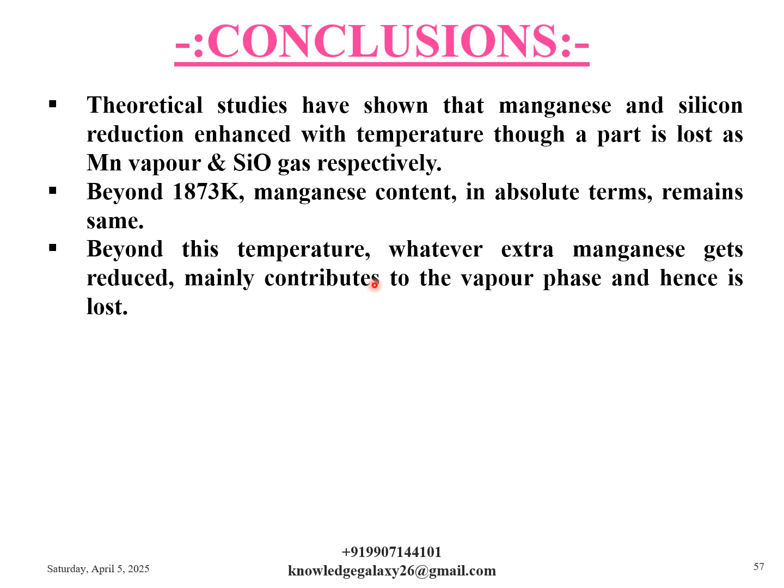So far so good. Now we have come to the conclusions, to sum up all the discussions, what I have presented in this presentation. Theoretical studies have shown that manganese and silicon reduction is enhanced with temperature, though a part is lost as manganese vapor and SiO gas respectively. Beyond 1873 Kelvin, manganese content in absolute terms remains the same. Beyond this temperature, whatever extra manganese gets reduced mainly contributes to the vapor phase and hence is lost.

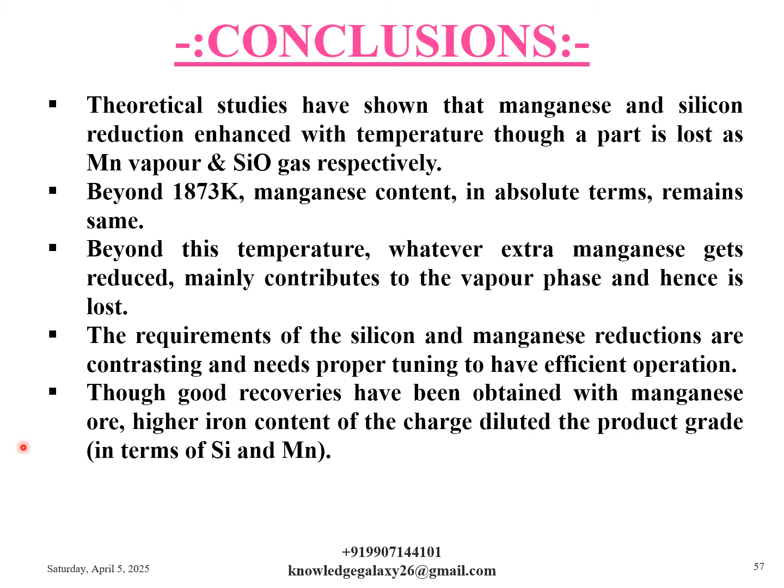The requirements of the silicon and manganese reductions are contrasting and need proper tuning to have efficient operation. I am again repeating this as it is a very important observation. Though good recoveries have been obtained with manganese ore, higher iron content of the charge diluted the product grade in terms of silicon and manganese. Increasing the manganese content alone is not sufficient to obtain a standard grade, that is silicon 16, manganese 63 grade silicomanganese. So these are the main conclusions of the observations and experiments I have explained.

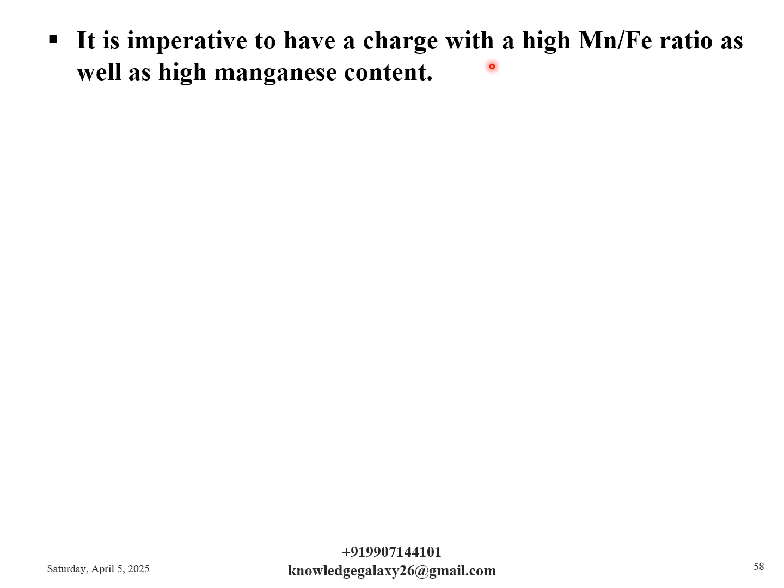Moving ahead, some more conclusions. It is imperative to have a charge with a high Mn/Fe ratio as well as high manganese content. With ferromanganese slag, alloy with desired grade could be achieved and matches more or less with that obtained by thermochemical analysis. I am again repeating this. When ferromanganese slag was used, the recovery of manganese and silicon was low. This is mainly due to metal entrapment in slag and high slag to metal ratio.

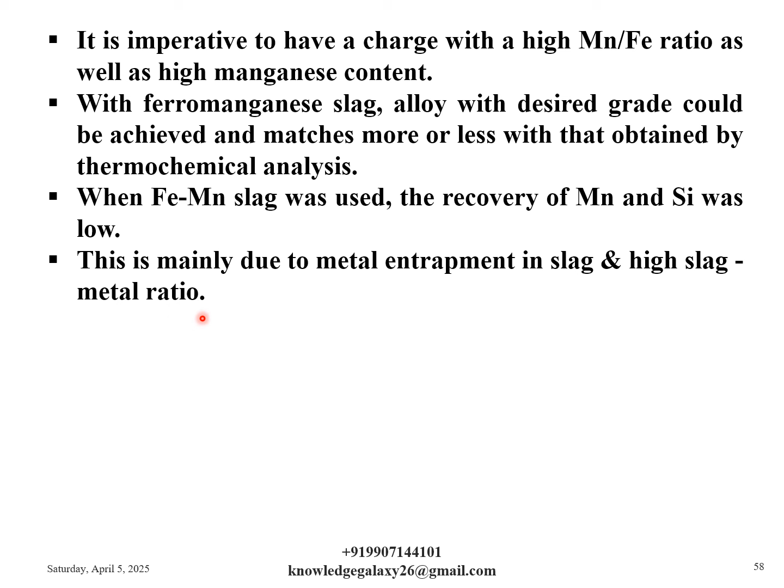Blending the sea nodule residue with a suitable combination of ferromanganese slag and manganese ore will help in improving the recovery of metals. Alternatively, a two-stage smelting of residue may be adopted which corrects the Mn/Fe ratio without blending. The same process may be extended to other land-based ore fines available in plenty but which remain unutilized due to their low grade. My dear friends, I hope I have covered every aspect of using low grade resources of manganese ores.